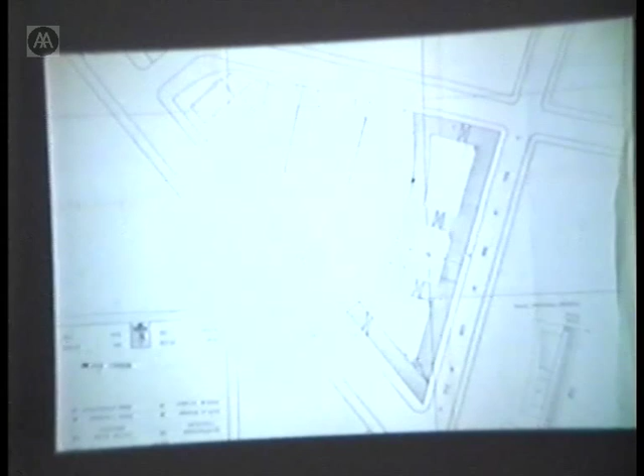Another solution to the problem, which was not a totally perimeter condition, but that of 2 courtyards. The halls are here, and the 2 women are over here. I have been accused of being rather rude to one of them, because the building, which is eventually on this corner, crashed into her, into one of her apartments. So there were more negotiations to go through.

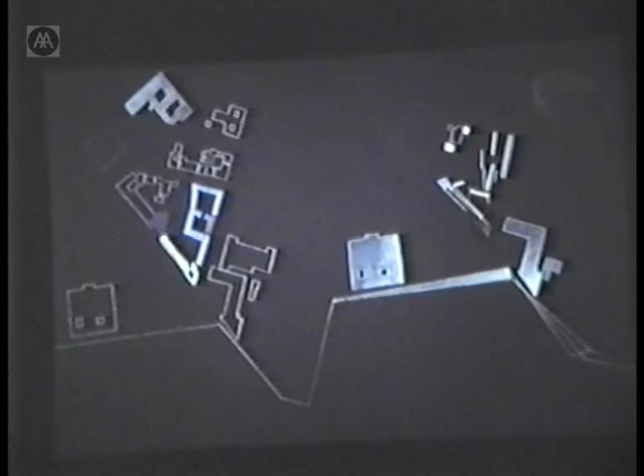These are very early studies of what had happened—these 2 buildings, the low building over here and the extrusion on the corner, and that's what could have been dealt with on the side, which is much more fragmented and really has nothing to do with this kind of gluing condition which exists all over Berlin.

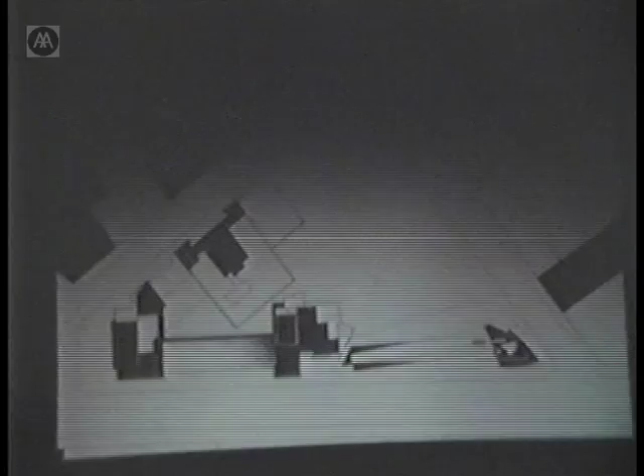In a way, it's a great pity that Leon is not here, because he has always talked about the monster which was created by kind of modern architecture. But I think he should have confronted his own monster, which is created in Berlin, which is a completely different animal in a way.

So this is again the site. We don't know yet whether we have this part or not, because the IBA doesn't own it.

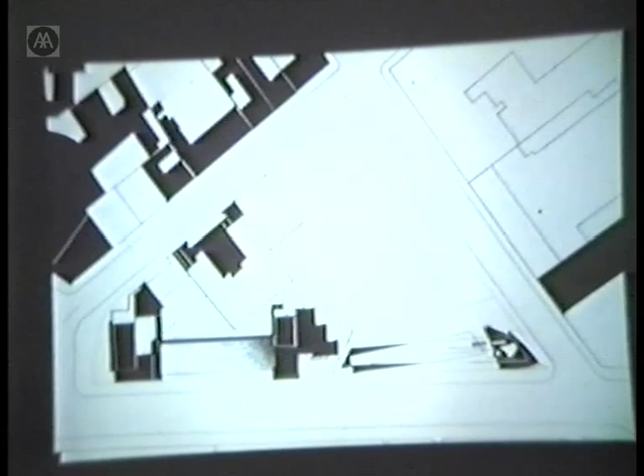And these are very early studies of the extruded tower, which actually comes out of these two low-rise buildings - one which is ours, which is two beams, one which is commercial on the ground, and one which is elevated townhouses, on two stories.

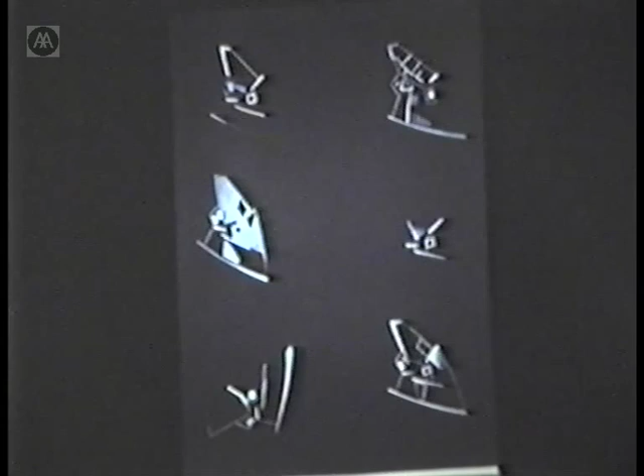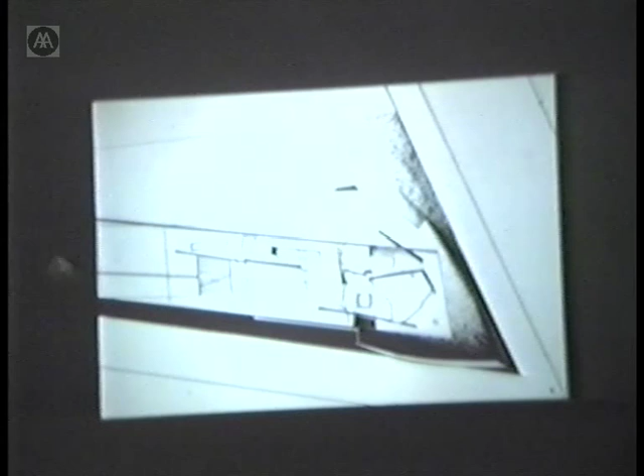And the idea for the tower was that it acts more like loft apartments, so the interiors are much more free. Again, that was not acceptable because we can't have studios, they have to be really very cellular accommodation. And as you can see, the length of this whole street is north facing, and this is the side where all the services have to go now.

Some of these are early studies of the tower, and some of them could be made into more like studio apartments. So this implies that the low building, which is more like elevated townhouse, are for families, and these were really much more to do with urban living.

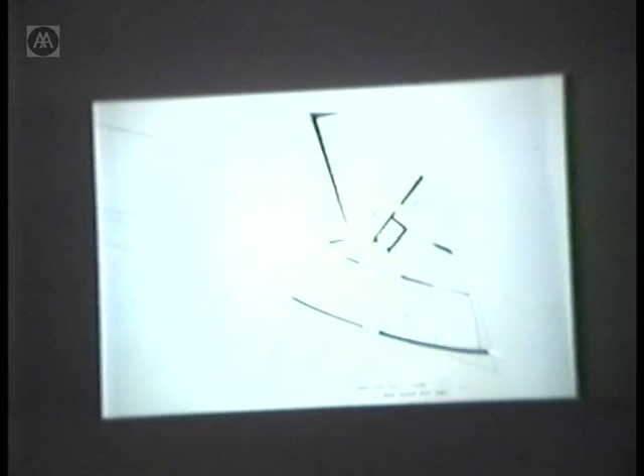I mean, unlike Peter, I forgot about Parker Morris a long time ago. I think I only heard of it in my first year there, and we were told to bag it.

These are, again, early studies about as you approach the street. It's more or less like Las Vegas, really.

So these are the two beams, which are the elevated townhouses, the commercial strip, and the tower.

And we can't have balconies either on the north side. And what we're supposed to do is have on top this children's playground, and we were told that children do not want to be up - they don't like heights.

So in a way, it took me a while to discover that if you want to build in Berlin, or especially for the IBA, it's not what you actually are able to do, but you have to really get everything which you can, which is always very difficult, because at the end you have to fit it between all these confines and limitations.

Again, these are very early studies of this project. The commercial street, here's the corner which is being lifted up, and this was going to be an open air lobby as you approach these townhouses.

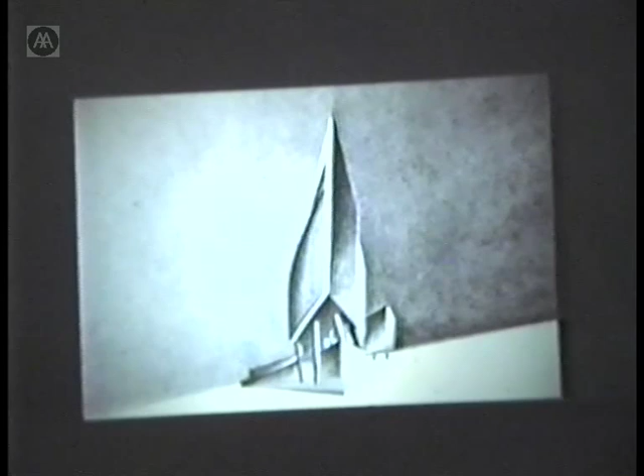So this, as you turn the corner, this is facing the wall and the museum. And this is the back, which is facing the courtyards and the gardens, which will be much more transparent and has different kinds of apartments.

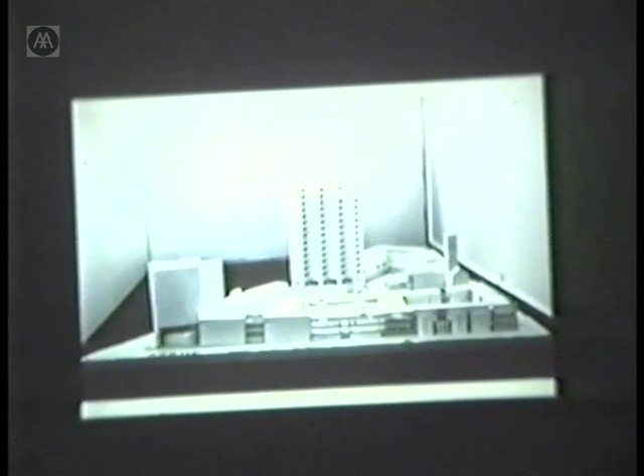And it was at that point when I went to Berlin that we discovered that this portion of the building actually does crash into my neighbor. So we had to - as you can see, the models didn't actually fit together.

So we had to come back and really do an amazing amount of studies to be able to not glue them together, but to operate this extrusion better.

So what we finally arrived at, I hope this would be acceptable, is that the building actually hangs over the neighboring building. And they said, but this is never done by IBA. And one of them finally said, which I'm grateful to him, that maybe it is time they do that.

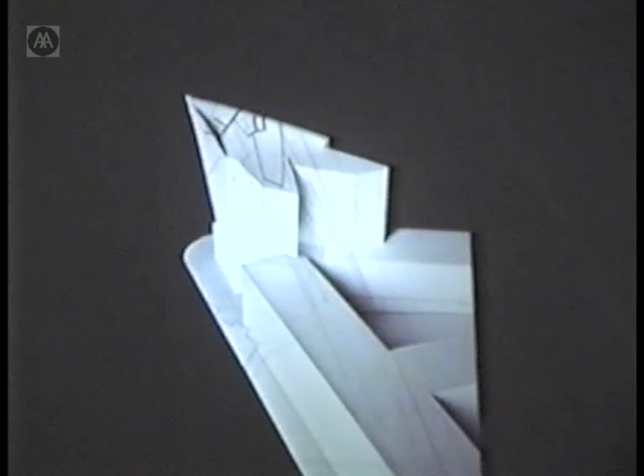So I don't know whether it was a victory or not, but we will lose many battles, I'm sure. And I don't want to sound negative about this, because it is a very interesting problem, but it is sometimes disheartening that we have to spend so much time to minimize anything which could be interesting in this project.

This is the elevated garden now, so of course the ecologists love me for it, and this is one of the later permutations of the tower.

And this is kind of, again, studies about as to when, how this extrusion begins to rest on the site.

The landscape for that part of the site, this is what we wanted it to be: the children's playground and the elevated garden, which is like open air rooms. And this is the flower beds, which are slashing the site.

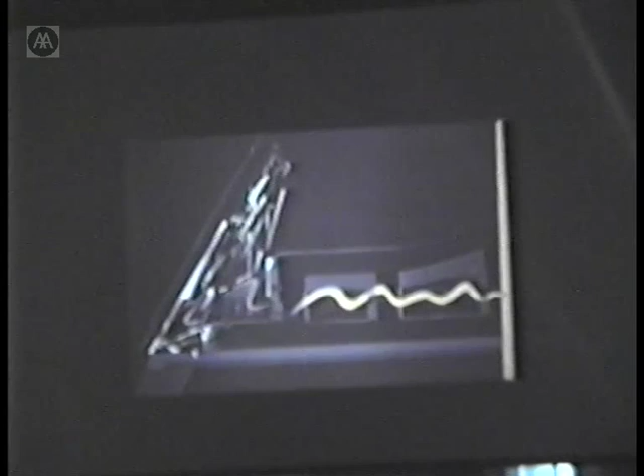The neighboring buildings and the walkway or path intrudes on these cute little pavilions which have been planted there. The main discussion is whether, if children are playing here, every mother in this block can watch them. So it's going to have a very different preoccupation than ours, which is really more to do with the interest in how to invent a new kind of plan, which is very minimized, and a new kind of living.

And then I go to my other project, which is on Ku'damm, which is an office building.

So this is the site, and I will point to it vertically because there is hardly any horizontal condition. This is where all this jetting club and all these rather peculiar events take place. And this is a bit of contextualism, which is an English furniture store.

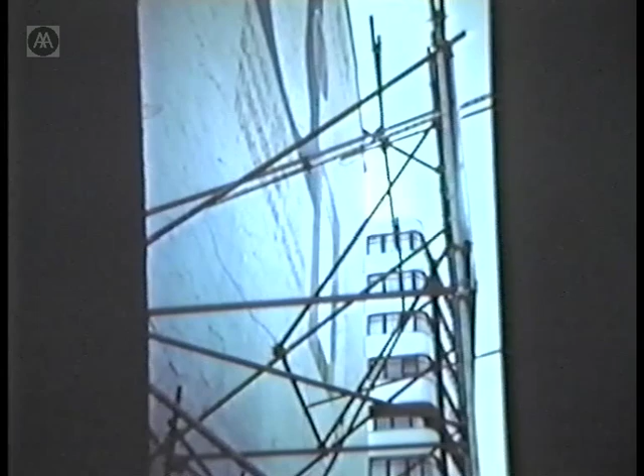And this was going to be an office building, and the site is 2.5 meters by 20 meters long. They keep reminding me that it's not a very economical project, and I don't know how 2.5 meters by 20 would ever be economical in their way of thinking.

So the project was really more like a test as to how much you can compress this notion of compression into a little what we call a slabette, which is all these elements crushed together to form an office building.

This is another kind of horror, which is in the back. And so this is the side which has been boarded, and we had to put everything here.

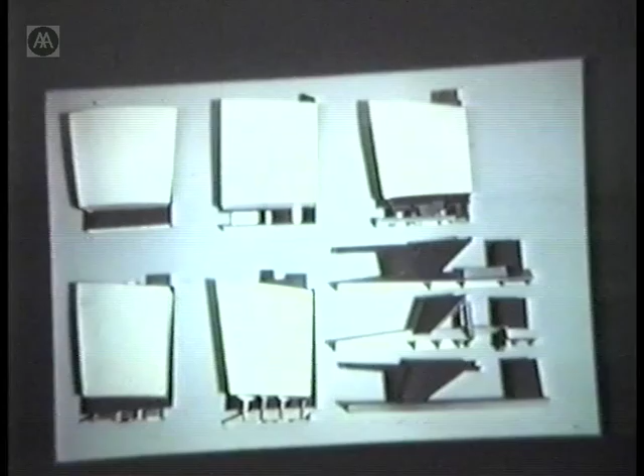And fly at the same time. So these are very early models, and what became a real preoccupation was how this building can relate to the street, because the obvious solution was to put an elevator at one end and a staircase at the other, and the street would become a corridor. Then this notion of relating to the street began to fragment, and how to engage that became a very important issue.

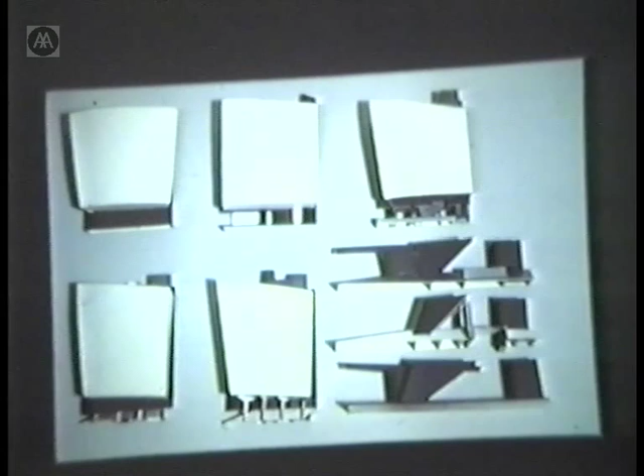At that point we started working with Peter Rice and Ove Arup, who I think were really ingenious in helping us resolve the notion of structure, which doesn't have to necessarily land in so many places. I'm sure Peter would tell me I'm talking nonsense.

So these are the very early sketches, which show how this building is on one hand really compressed, but on the other hand shearing from the existing firewall. And these are the very early studies of the many permutations one can deal with on this site.

This is the existing firewall, and how this compressed building could begin to shear from the wall to give this condition on the ground and an entrance, and also a space which is not necessarily necessary to occupy inside the building. All the early studies.

And how the structure began to change. One of the very early diagrams involved putting the elevator at one end of the building and using the staircase as a tie, which ties all the structural walls together.

And what became really interesting is that every element in this project has a particular function and purpose, and all these walls added on the side are all structural walls.

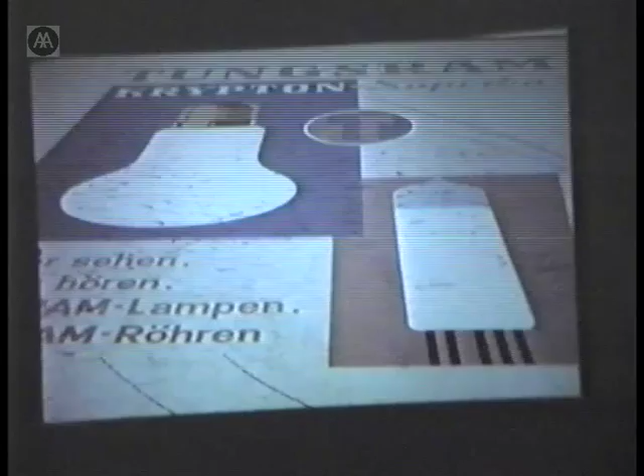One of the drawings which we submitted for this competition last summer was that, which shows the building of these layers, these horizontal and vertical layers. The existing firewall.

So this is the site, again, with the mural and the Jet-In Club relief. The first wall, which is a new firewall. The firewall and the ramp. The elevator added on.

The transfer stairs, which transfers the circulation from the first floor to the ground. The second structural element, which is this other wall over here. The lobby, which is in blue. The beginning of a third structural wall and the cantilevered floors.

And finally, all the compression of all these elements behind this curtain wall.

So this gap, which is left in the back, creates this condition, this sloping circulation, which was even approved by the fire department, because if you throw a rope from here, it would land there, and therefore it means that the fire truck can actually reach it.

That was the most animated meeting I've had in my life with the fire department, who couldn't speak any English, and I couldn't speak any German, so he had to do everything by noise. And he had a little fire truck with him to explain to me how this could be done. You can imagine the noise he had to make to show me that if you run from here to there on the floor and there's an explosion, there should be no partitions and so on. This lasted for 3 hours.

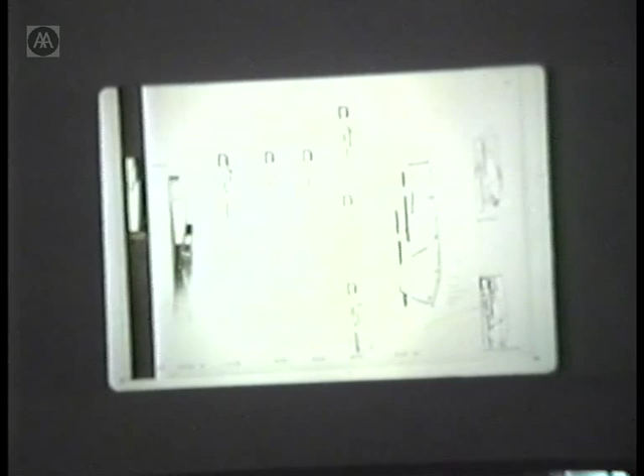The way the curtain wall operates, which I'll go through later on, is that as the building goes up, the floors begin to expand, because this is the 2.5 by 20 condition, and then it cantilevers over the pavement. As the floors begin to get bigger, the curtain wall begins to shear from the actual floors, and the gap in between is a glass floor.

One of the early diagrams of the arrangement of the interiors.

Thanks to Michael Wolfson and Piers, these perspectives, which I insisted on them becoming increasingly more abstract, became even incomprehensible to me. They get worse. And I still don't know what that is. You can have the next.

I'm sorry, it's sideways, and I apologize to Peter Rice, who has helped us really a great deal with this. I mean, they're unfortunate to inherit us.

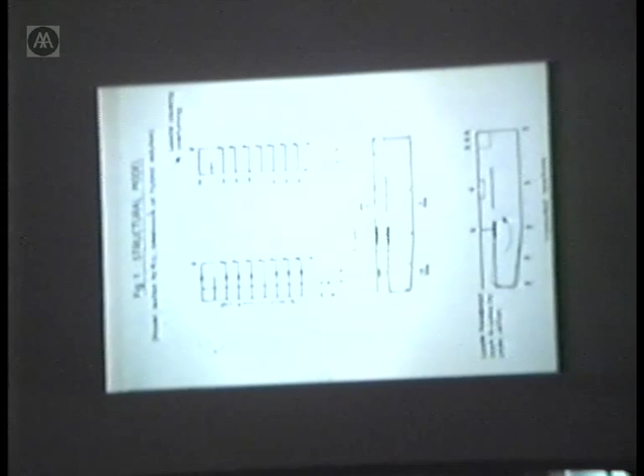This shows the basic principle of the structure and how, in a way, this building, even if it's very small, I think the reason it became actually very clean is because every wall had a particular task.

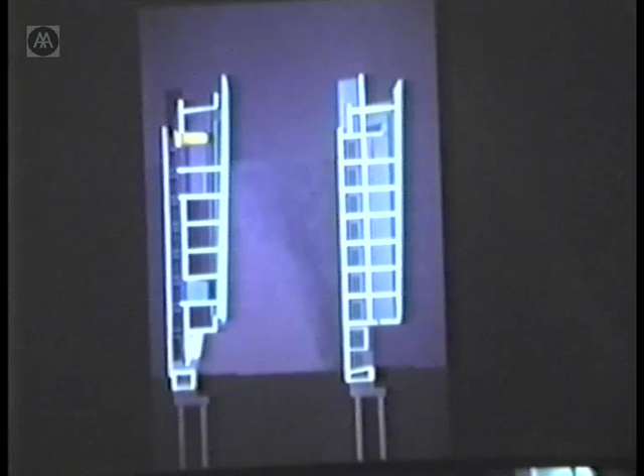The blueprint, which is the section. I have to admit it's a laborious blueprint.

The staircases, the elevators, and these are all the lobbies, which, contrary to the floors which get bigger at the top, actually get smaller.

The back, this is another section cutting through the back of the new firewall, the entrance and the transfer stairs and the room at the top, which is the gap, which at the very early stages the developer wanted to eliminate because it's air, you don't get money for air.

And these are the studies for the various elevations. The back, the main curtain wall elevation, the glass elevation. There's another glass elevation in the front showing the gap, the elevator, and all the different balconies for leisure and for fire. These look like dentures, but they are balcony studies for the front and the back.

And the bowing curtain wall, which we are facing incredible problems with.

This is another sequence which is not to do - Clay has insisted that this was done by a computer, and it really wasn't. It's thanks to Piers again, who spent hours trying to imitate a computer, which shows the building as you move around it from frontally to sideways, as the curtain wall begins to compress the interiors, and how it's seen in the front as you move to the side and from the side elevation.

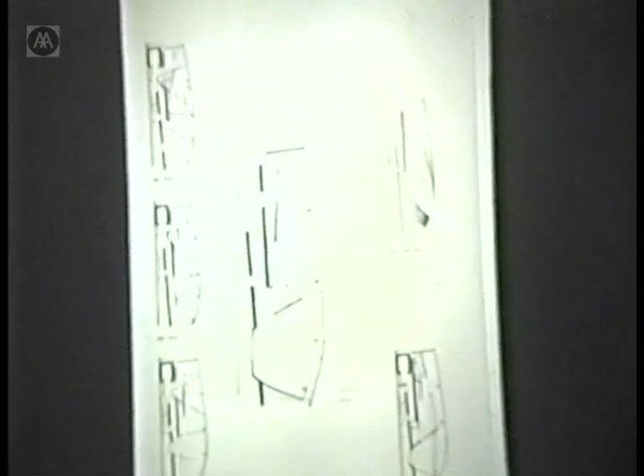The curtain wall. Early studies of the section and the curtain wall detail. This is the section with the panels going into the base of this rather complicated foundation. The section through the building and the detail of how the glass wall meets the glass floor.

And I have to really thank again Hugh Dutton for helping us with this. This is the front of the building and shows this room which becomes the only really free element in this compression, which goes also at the back.

The curtain wall detail, the glass wall and how it meets the glass floor and the floor slab. A close-up of that condition.

I'm going back to the rotation drawing. So this is frontally when the glass is not lit. Another early sketch of that building.

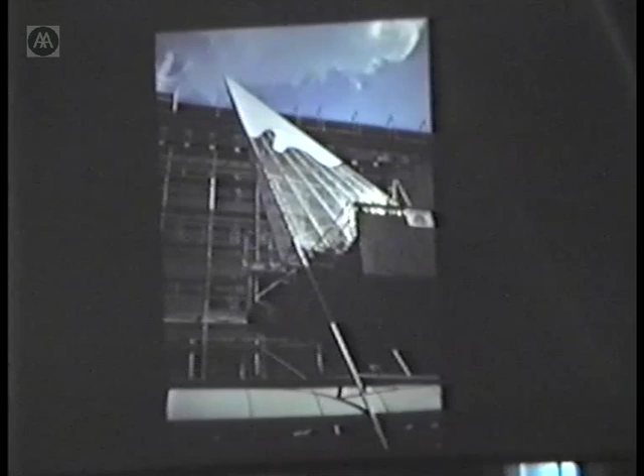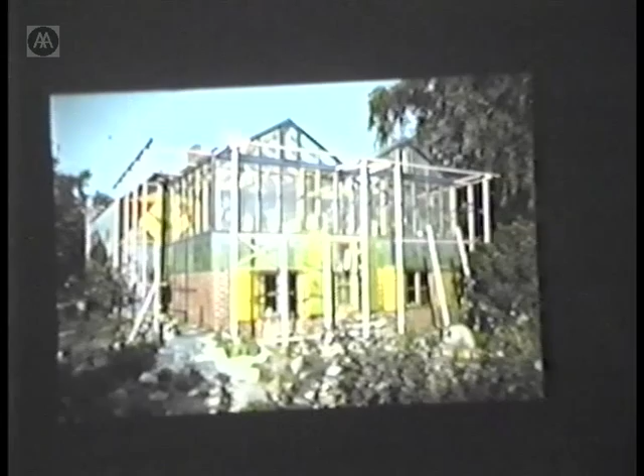Another project, just to show a bit how the areas in Berlin are too. This is a land in Berlin, and I did a small house which is an energy research house. I also wanted it to be very colorful, so that people could cover it if they don't like it.

Another bit I did was a park in Berlin, which mainly was an axis and hidden objects in the landscape, designed at the same time for children as well as for adults.

So that was kind of an introduction, and all of that were pre-London designs, before I came to London.

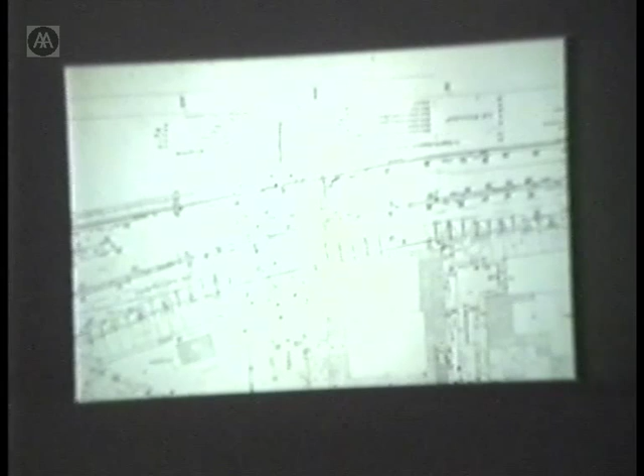This is a typical situation in Berlin. This was an early elevation and testing on site. Another bit was that this element could have different angles to the road depending on how close the houses are to the highway, and you can see the different angles.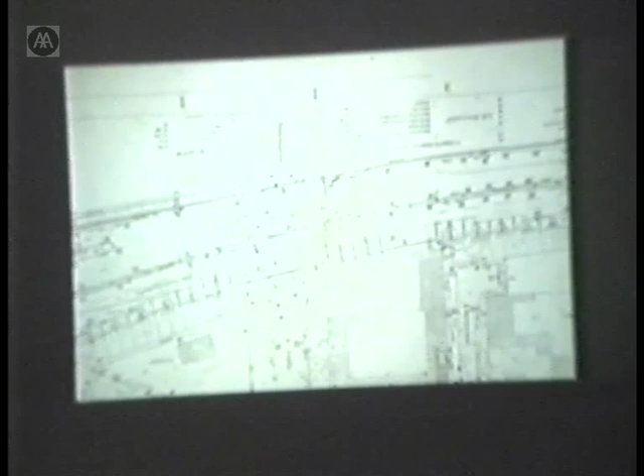And that would help so that when you go by car, you don't get a heart attack, or that it disturbs your heart rhythm.

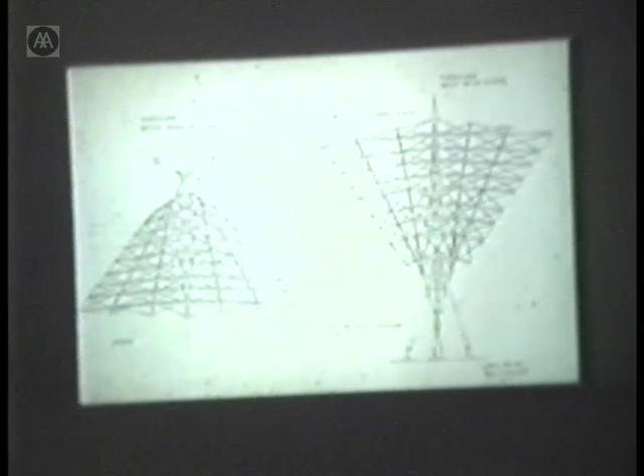And we try to find out construction with different angles.

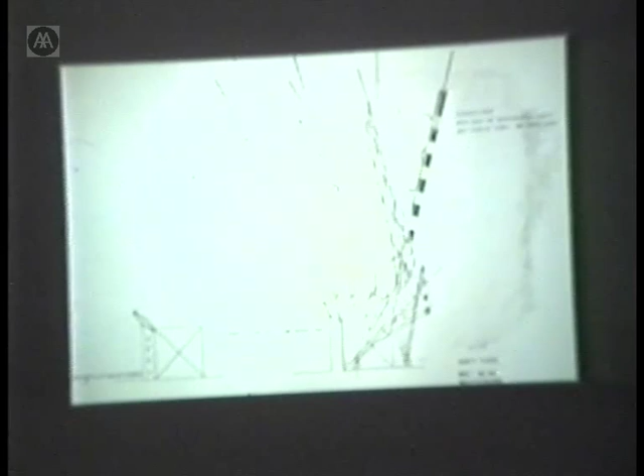We thought first of a mechanism where you can fix the object in a certain position, but that you can change that. We later found out that it's not necessary.

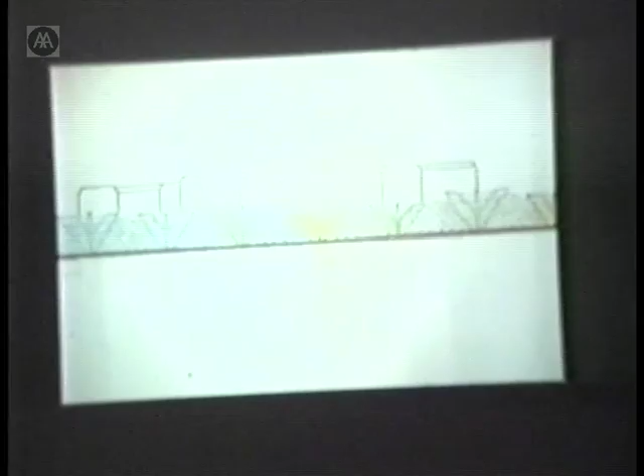By the way, on this project, Matthias Sauerbruch and Carlos Villanueva did studies. Then it has to do with running along, so I'll go through very quickly through a sketch.

So this project had several stages. After the stage you have just seen, there came a second one where Peter Rice really came to action. And Peter, I ask you whether you would like to explain it or whether I should continue.

We looked for a construction and production method which makes it possible to mass produce that object, because the problem with it is that it is quite expensive, even though it gains energy in the end, which should then be delivered to the houses close to it.

Peter Rice proposed a method of bending metal and producing pieces without having a huge factory for that, which you can bend in a line, and also cut into pieces, and when you put those pieces together, they in the end give the complete object, and they are self-stable.